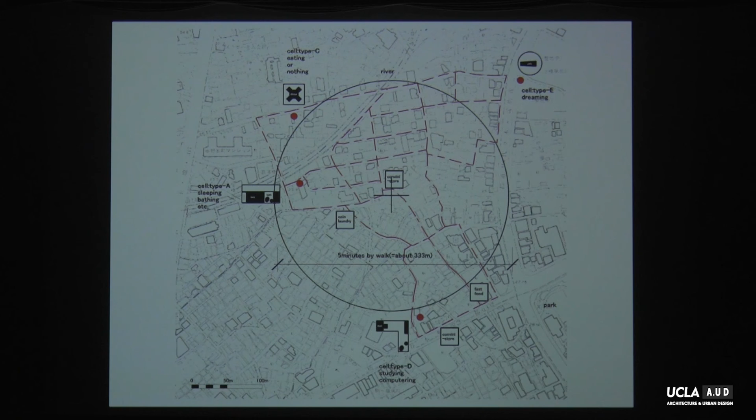Then this is the first project. It was like re-understanding the city of Tokyo. And this is another proposal.

At that time I was also interested in boundaries, because the boundary is one of the most fundamental things for architecture, to make walls, to make a space for architecture. So how to deal with the boundary was an interesting topic. Also my experience in Tokyo affected this, because in Hokkaido it's a really cold place, getting to minus 20 degrees Celsius or something in winter. So the boundary between inside and outside is really strongly divided, otherwise you will die. But in Tokyo the weather is rather warm, so the boundary is rather loose in a sense.

I was living in a small room of 13 square meters, one space, so it's quite small. When you open the door you get out to the corridor. The width of the corridor is around 1.5 meters, so not so different from the width of my house. Then going down to the street, the width of the street is 2 meters, so again it's not so different.

Inside your house, the width of the room is around 2.2 meters, and on the street the width is 2 meters. So it's almost the same dimensions you're walking around. Between inside and outside, you don't see so much big difference. That was interesting for me.

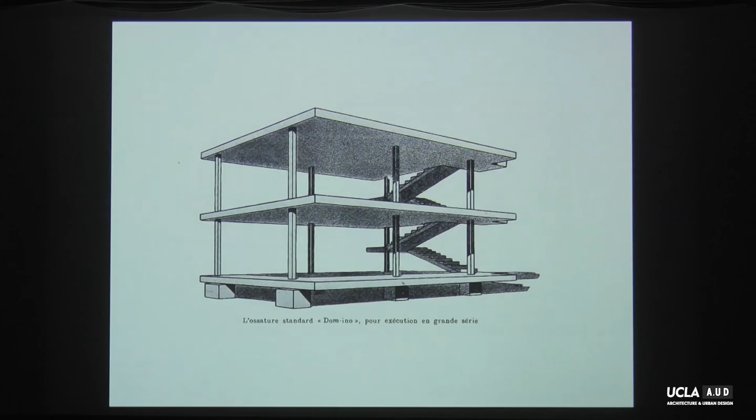I try to, of course—I love Le Corbusier very much—so I like to integrate that kind of chaotic situation with super clear, pure form-like situations together. And finally I invented those kind of crazy compositions: many, many plates. In that sense it is influenced by Le Corbusier's systems.

So many plates with a 35 centimeter gap, so that you can sit on it, as you can see, or use it like tables at double size, 70 centimeters, or use it as shelves or staircases or something like that.

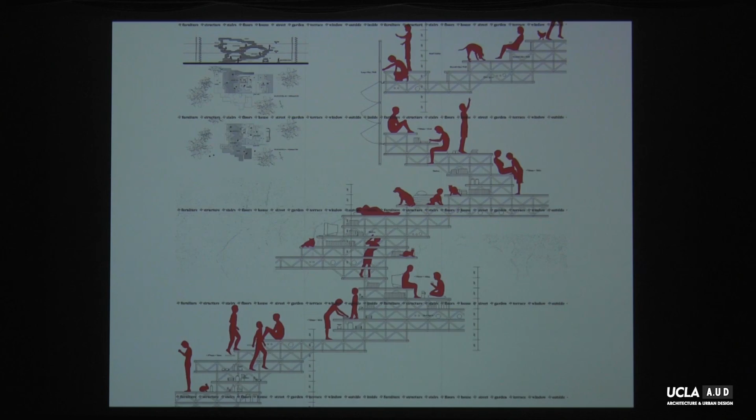There are many, many steps, but no specific functions in it. But if you get closer, you will find how to use it or how you like to interact with it. In that sense, this could allow people to interact as they like—allowing chaos, but within an ordered gap of 35 centimeters.

So for me this is a personal integration of Le Corbusier, pure systems, and chaotic situations. There's also integration across furniture scales, architecture scales, and possibly landscape scales. I try to integrate these kinds of things.

Or I try to re-question: what is furniture in a room, for example? It's normal to have chairs in rooms, but is it really normal? We should have functions, but what are functions? This kind of re-questioning and rethinking enables us to think about strange ideas, but pushes us towards the future.

After those conceptual thoughts, I got a small chance to realize one project in Japan. It was a competition to create a kind of wooden house. I read all the briefs, and at the last sentence they said all the materials could be given by the clients, since the client is a timber industrial company that could provide the whole materials—but the whole budget was limited. So, limited budget plus a given amount of timber.

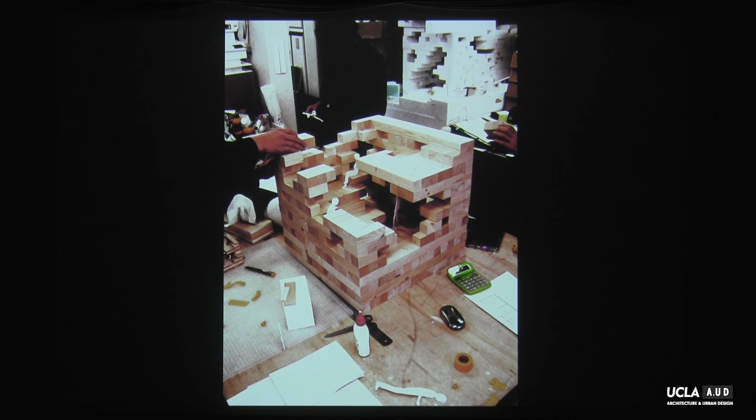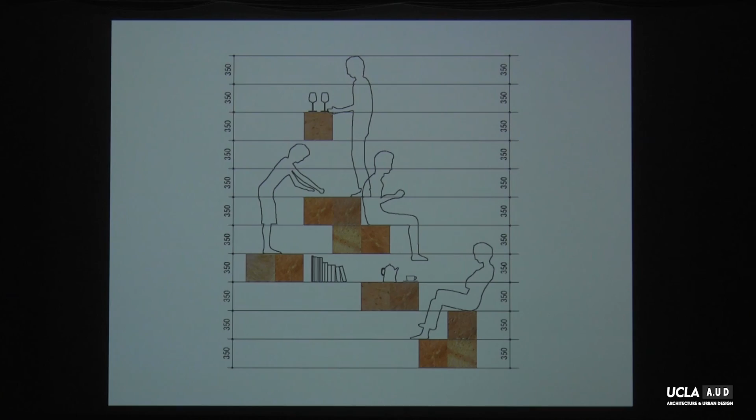Again, this is the same concept: to create spaces for people, but not specific floor areas or specific functions—more like many steps where you can choose as you like. Finally it was built, though reduced and shrunk a little bit, because even using such a big amount of timber, it was too much for the clients, so they requested to shrink it a bit.

The minimal size is about 4 meters by 4 meters by 4 meters cubes. It is quite small, but it has glass walls and doors, and it has a small kitchen and bathroom, so it's like a house, a small cottage.

It was a competition, but it was lucky for me because the head of the jury was Toyo Ito. And he's, as you know, a crazy guy, to choose this as a first prize.

The competition had an open presentation and open discussion to decide the first prize. The jury members included Toyo Ito and other architects, and the head of the client company was there. The head of the timber company was against it until the end of the jury sessions, but Toyo Ito said, 'Wow, you should make it, this is quite crazy and interesting.' Finally, Ito-san persuaded the clients to accept it.

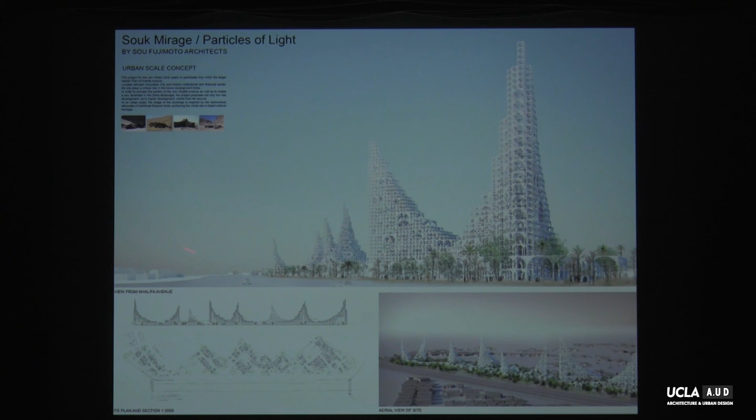So finally we proposed, at first, those kinds of 7 or 8 towers, because the site is so flat in the middle of the desert. Like a landmark, it would be nice to have a landmark. But this is not only a landmark as an object — it has a huge void inside like this to create natural ventilation from the bottom, with cool air going up as the hot air rises.

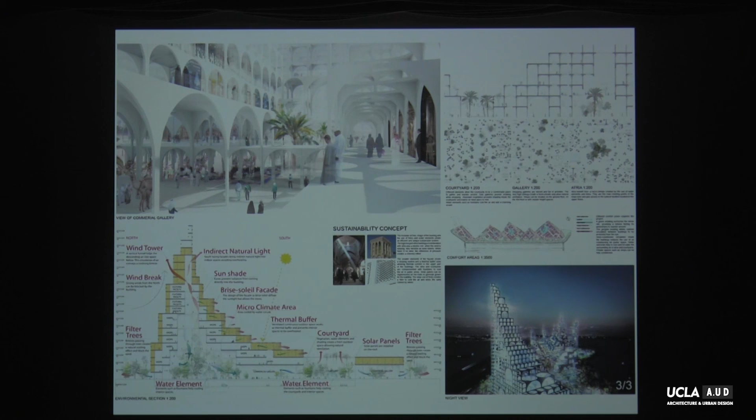So it's a landmark, but at the same time it's like a natural ventilation system. Inside, there's a void—nice, of course, to have such an atrium in the shopping areas. But the most interesting and exciting point is the structural system: many repetitions with arches, circular shapes creating the whole structure, which could work as a sunshade against the strong sunlight in the Middle East.

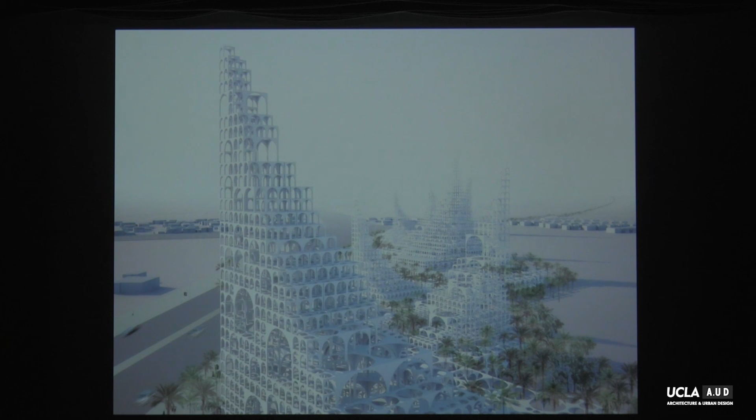So the glass line is set back from the outside. Inside, you can see many filtering structures blocking the sunlight but still bringing in proper, beautiful light. So the whole structural system is making the structure itself, filtering the sunlight, creating a huge void and landmark, and of course the experience of shopping. All of those things are well integrated into this architectural form. That is why we are so excited.

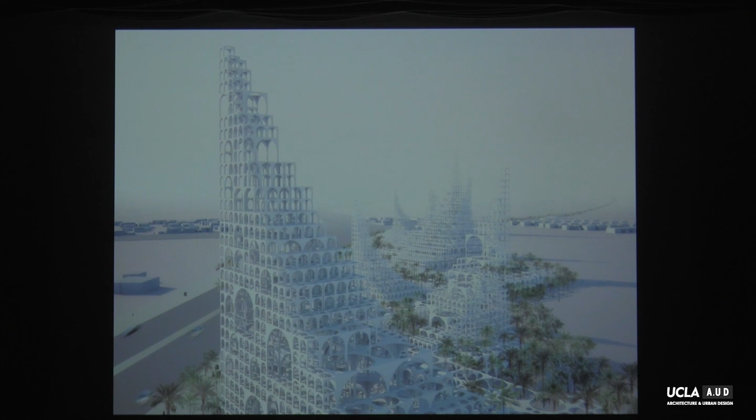As you can see, this structural system is, in a sense, almost the same as the Serpentine Pavilion—repetition of grids. If you don't think about the shape of the arch, everything is like a repetition of grids, sometimes double or triple grids, but everything is made by the grid. The whole shape in the Serpentine case is like a cloud, and in this case it's more like many peaks of towers. But the outer shape could be more flexible. So the system behind it is the same, but the scale is quite different.

That is the thing I didn't expect. When we did the Serpentine, that smallness of the grid was very important because it fits furniture scale, it fits human bodies and interactions. But if you think about 1.2 kilometers, then you can be more brave, forget about the original concept, and expand it to see what it becomes.

Finally we thought, well, this is similar to the Serpentine but different, and could be something interesting because it's beautiful. Then we thought, because they have money, we could make a lake in the middle of the shopping center to put a boat—that kind of crazy shopping experience is possible in the Middle East, with beautiful sunlight coming down.

So we were just enjoying expanding our ideas, being involved in such unknown situations. And yeah, it's quite like beautiful translucent towers in a sense.

But finally, after submitting the 28 panels and starting to talk about the date of presentations, we got one email simply saying this competition is cancelled. Everything stopped—no payment, nothing, no winner, no loser, just stopped. Of course it can happen in the architectural society, but it's a pity.

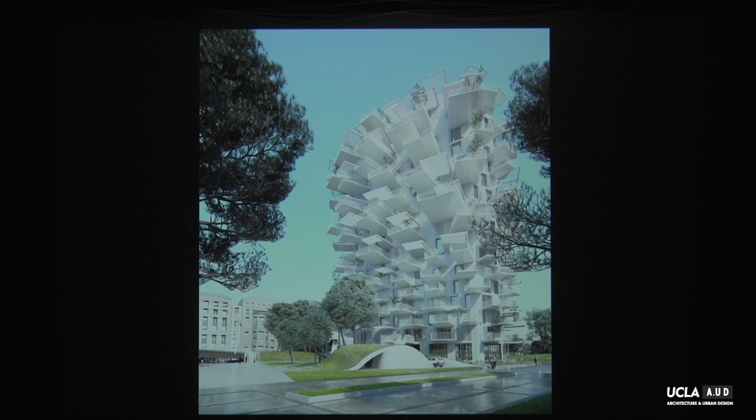This is one of the latest works: housing towers in the south of France, Montpellier. I don't know—this has some conceptual relationship to the previous ones, but again, after making those kinds of crazy things, I'm not afraid of anything, so I have the freedom to do it.

But here again, I met a different culture, different climate, different lifestyle, and those inspirations make me think about something new. Montpellier is a Mediterranean city—their climate is quite nice, like here in California. Even in wintertime, they have lunch outside on the terraces.

For hundreds of years, they have been doing that kind of lifestyle to enjoy the outdoors. So the competition brief was to make a 50-meter high tower, and how their traditional lifestyles could be integrated into such a contemporary high-rise building.

The solution is quite simple: huge balconies. More than 200 balconies and 100 pergolas are on it. The biggest one is 8 meters by 6 meters, so it's quite huge. And many lives are happening there.

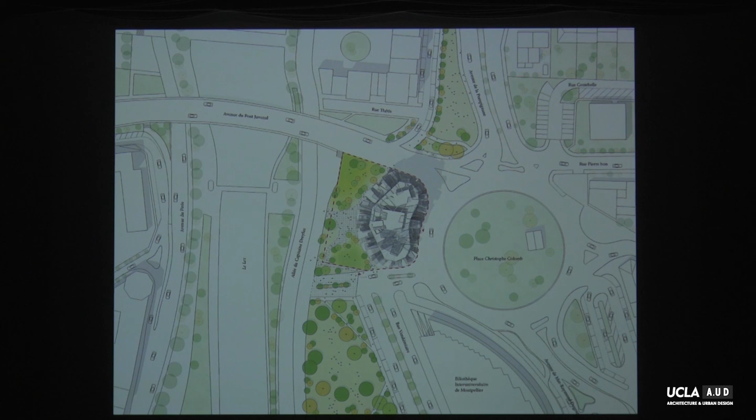The housing volumes and balconies are quite typical typologies of an apartment house. But with the unique shape of the volumes and the huge size of the balconies all around, such basic things change into something new—almost like a pineapple or a pine cone. It's basic, but quite something new.

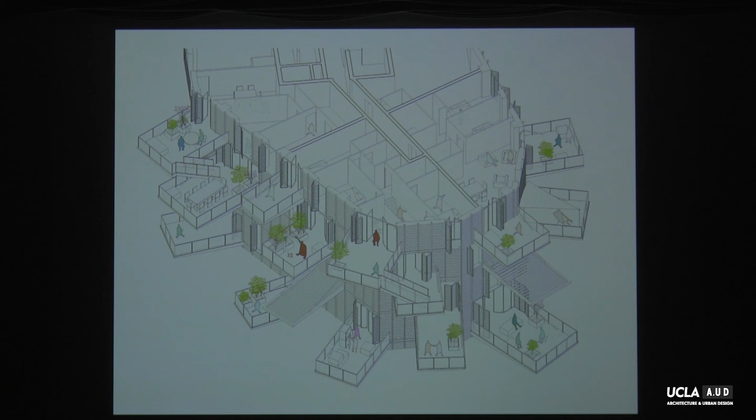Some apartments have 2 or 3 balconies. We also have duplexes—2-level apartments with 2-level huge balconies connected by staircases. It's like sky staircases, really huge living space in the sky.

Now we have the construction process. The building cores or volumes are almost finished, like this, but of course there are no balconies yet—nothing yet. From the end of this month we started with the balconies, from the top to the end. It will be finished in one more year.

This is the mock-up for the balconies, to test the structure, the details, and the finishing. Like this. I'm really looking forward to seeing the finished building.

More interesting to me is seeing the life coming out of the balconies. The building itself is beautiful, but when the life comes out, with parasols, colorful furniture, and other strange things all covering the building, it creates a three-dimensional vertical layering of lives. It's amazing, I think.

The architecture here is like a platform that allows such beautiful lives in the sky, and the foundation of that whole life really must be very beautiful—a 50-meter high stacked life that could happen. I really, really love to see it.

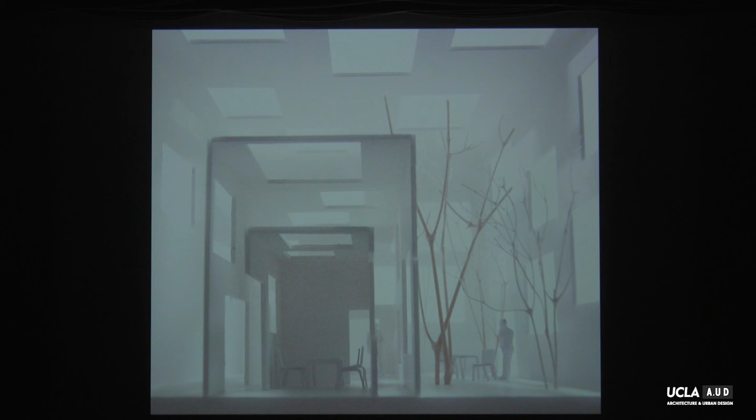The middle box has glass, so it's an actual boundary, but we still have a small house inside. So inside the middle box is still outside the small box, and outside the middle box is inside the big box but actually outside, or something like that—intentionally confusing situations between inside and outside, because we thought definite boundaries are a little bit sad. This is in-between spaces.

We have trees here—this is outside—but as you can see, it's really enclosed by the big box. This diagram shows on the left a normal wall dividing inside and outside, which is a bit sad because it's only 2 choices. On the right hand, we have gradations.

Then we can have more choice. Deeper inside, you can be more private, and then outside, you can be more open. But in between, in the middle, you can have various different situations between inside and outside. I like to create more choices, more varieties for your life. Then your life could be more rich, I think.

So the gradation concept is related to the richness of life. And blurring the boundaries is not only the architectural interest, but try to create how to make rich choices in your life. But of course, translation from such a gradations concept to here should be done, in a sense,

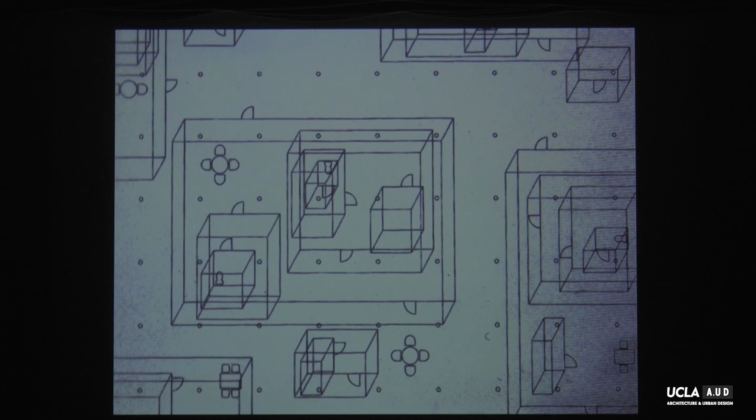it was a jump, because I had the previous ideas of layering done 10 years ago. But to realize those kind of box in box in box, not only in the plan, but even in the sections, was like a big jump for me. And every time those kind of small occasions, the actual site, actual clients, make me think more about it, and finally stepping forward a little bit more.

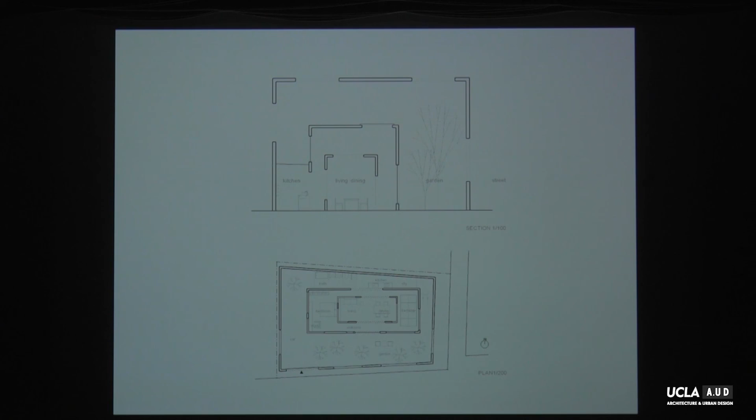And in this case, that kind of three-dimensional layering was like a small jump, because as you can see, this is the situation. All surroundings are like a typical Japanese house. And the front house, from our house, and the garden in front. So this is like a typical situation.

And the previous house on our site, before the new house, from our client's house, was almost the same, house and garden. And in a sense, we just put the bigger box covering the house and garden situation to make house and garden as a house. So it's like changing the definition of just a normal house and garden by the spatial strategies.

This is the view from the inside of the big box. So it's inside, but still outside. Rain comes in, and then you can see the second box. This is a view from the smallest box. So you see small box openings, and middle box openings, then the big box, a little bit fragmented, with openings and the sky. Then you will see, as I said, it is layered three-dimensionally.

And this is fascinating because you can see sky fragmented, covering you. So it's quite open feelings. But at the same time, you are in the middle of three layers of concrete boxes, so it's really, really protected feelings. So those kinds of coexistence of openness and protected feelings are together in here.

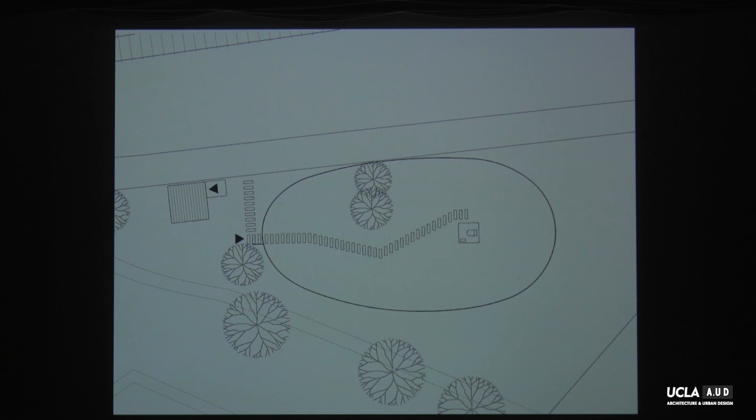So sorry for that kind of situation. Everything is quite simply made, and we kept the existing trees, and the garden itself is just green grass, so it could feel quite natural. I like to make such unexpected situations - open the door, and then the normal green grass and trees are there.

Oh, thank you. Okay. And...

Actually, the funny story - I don't have much time, but I'd like to talk about the funny story of this. Because this is finally done, finished, and it gets famous.

And finally, many tourists came here by big bus to see it. Not only one bus, but 2 buses, 3 buses parking outside, making a long queue to take photos - not to use the toilet, but to take photos, like a touristic place. Well, it's okay, it's nice. The city government people were so pleased about that.

But then, after a while, so many people came, and for some of them the next stop was this toilet, so they'd see it and take photos. Some people thought, wow, the next stop is a toilet, so I'd like to use the toilet, maybe it's a nice place. But then arriving, there was a long queue for photo shootings, so they couldn't use the toilet.

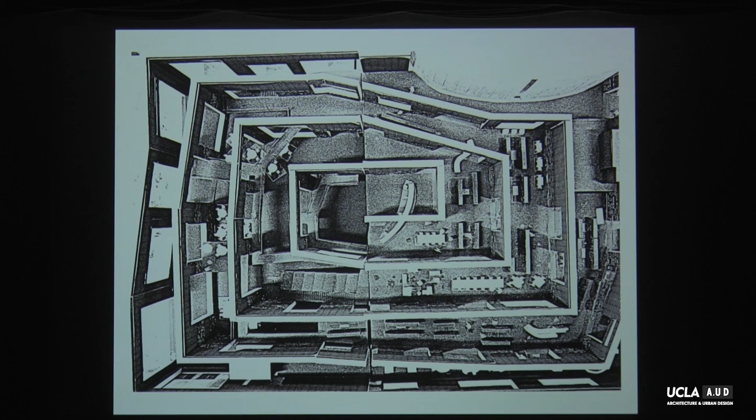This is a library of many, many layers of bookshelf walls, like this. Because it is a spiral shape, only one continuous bookshelf is making the whole library, with many openings. This is an important point - like a house, box and box and box house.

So you will see, you will feel the layers. And then those kinds of layers make you feel, wow, something behind this wall is happening, something interesting is going to happen behind this wall. What is happening? Then you start to walk around.

Because I like to make the library like a forest of books. Of course you have to find some books if you need, but on the other hand, the library is a good place to just walk around without any purpose, to get inspiration, to get ideas, or to encounter unexpected books. Those kinds of unexpected feelings could be like a forest, I think.

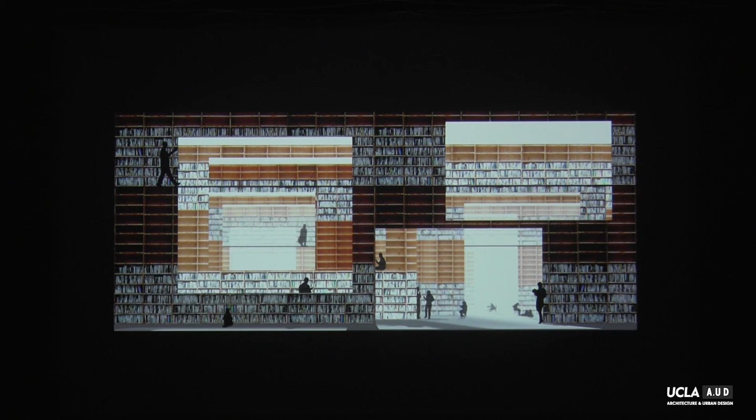And then walking around almost infinitely could be a nice thing, created by those layers of bookshelves. Finally, it's like this. So you will see how the many layers of bookshelves with many, many openings could create those kinds of labyrinth-like feelings.

And even outside, we have those kind of feelings. Inside too, going up to the main floors with the beautiful ceilings, because it's made by polycarbonate materials with the skylights, so it softens the impressions and reflects the bookshelves a little bit more upwards to make almost vanishing ceilings.

And then you will see how the space is always vanishing or always layered. Next space, next space, behind it, to create such kind of expectations and invitations.

Sometimes, most of you could understand how comfortable the space is by this woman. But actually, the space between these two walls is like 4.5 meters, so it's really residential scale. So this is the interesting point of this spiral-shaped form, because each space is defined by such kind of residential scales, divided space by space.

But on the other hand, at some point you will feel such really spreading, huge spaces. So small, tiny, cozy scales and almost infinite spreading scales, both of those scales and in-between scales are coexisting together in these spiral shapes. That is an important point, an interesting point of this form of the plan.

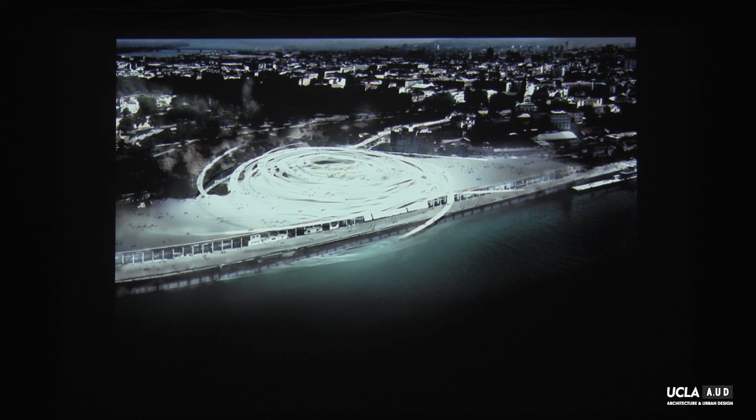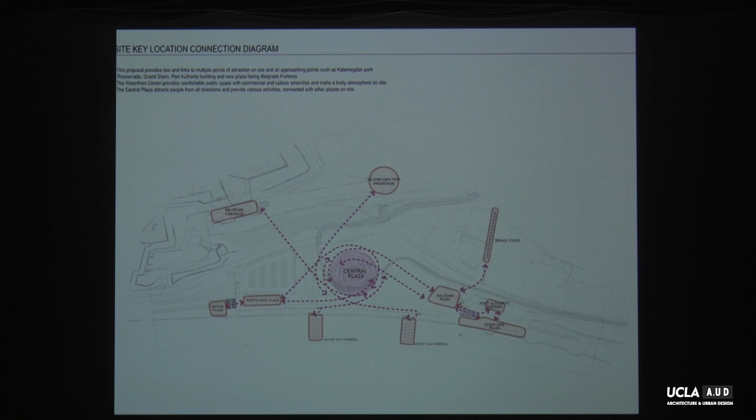And the space itself is not a dead end, should not be a dead end. Many things are coming in and coming out. From the fortress above, people have to come down, and from the river, people come arriving. So those kind of flows are the key of the site, we thought.

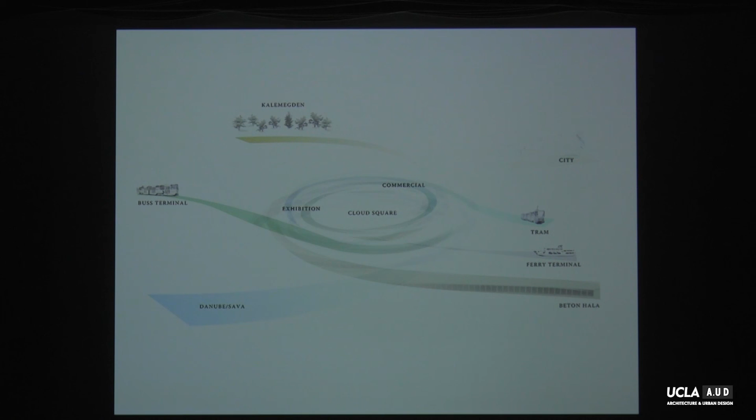So we just translate those kind of site situations into physical architecture, like this - connecting the different levels and connecting the different activities and traffic, but finally creating a really strong central plaza in the middle. So everything is flow, but in the middle of the flow, we have a central point where everybody can come together.

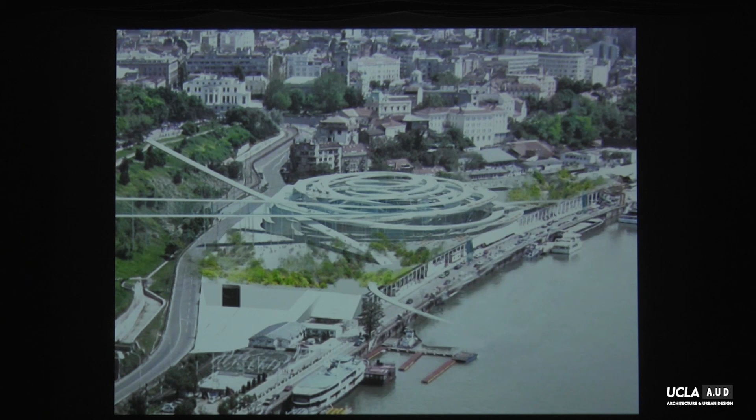So it has commercial areas, exhibition spaces, traffic terminals, cafes, and everything. Those kind of public programs are around that central plaza. This just looks like a pathway - some areas in the middle of the bridges are inside, some outside. So it's really an urban central plaza.

And then people can walk up. Of course we have many shortcuts, so you don't have to walk a kilometer to come down. So this is very different from the delicate treatment of the layers inspired by the spiral shape of the library walls, but it's still like a continuity or consistency of the ideas, just big jumps.

So again, if you meet with such strange situations, you can be brave enough to make a jump. And then finally you achieve something strange or something new for you, but still you can keep your ideas, because your idea is strong enough - consistencies. But jumping to other stages is always quite exciting.

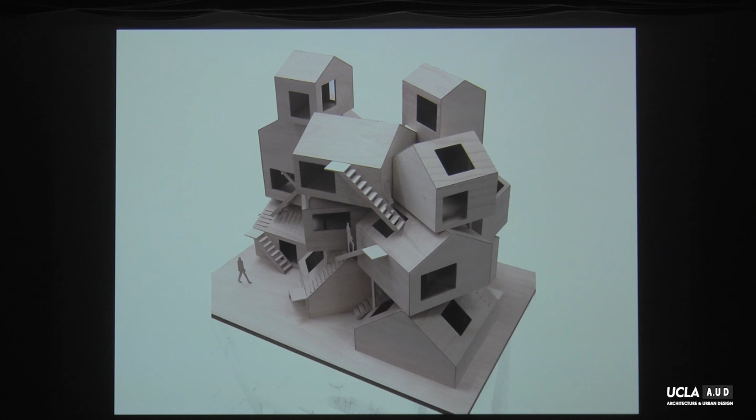Could be very exciting experiences. And then it must be like a housing, small housings. We studied a lot, and then finally made it. The client was crazy, so he enjoyed this, and then finally it's done.

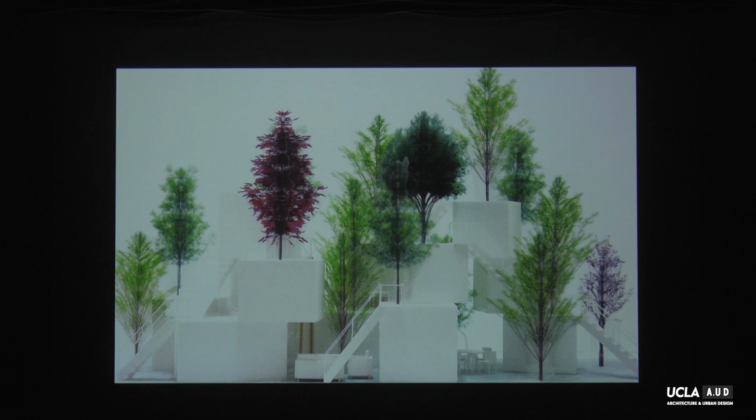And then you will see, it's a bit shrunk, but you will see how those kinds of staircases bring you up to make it like the small pathway in Tokyo, layered and stacked to create the 3-dimensional city, like this. And this one also, like stacked houses with the greens on it, because it is also nice to bring not only the houses but the greens to make it more 3-dimensional. Then you can actually see the pathways, alleys could be 3-dimensional.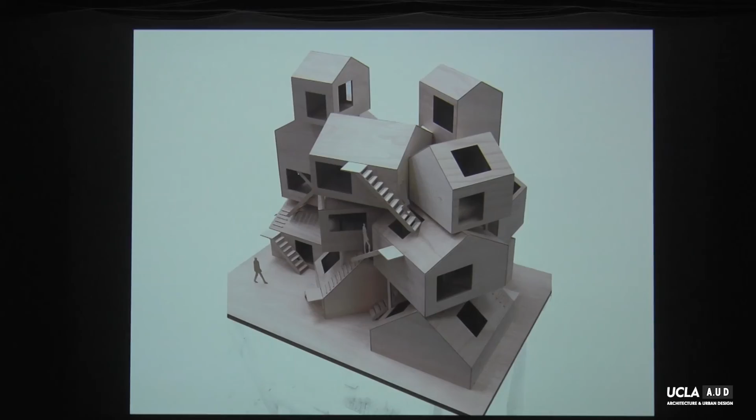This is a private house. It's rather like a model house for experimentation, so not for a specific client, but for the model house. But each small box is quite small. Boxes are small rooms connected by those staircases with trees on them. So it's like this, and some of the boxes are outside boxes, some of them inside boxes. Going back to the previous ideas, this one is like small boxes scattered.

And in this case, on one side, we stacked them up, but still it's divided with some trees on it, and then those small staircases are connecting together. So recreating city-like situations into architecture is always full of inspiration, because the city is so different from architecture. So how to understand two different things in a contradictory situation and try to make integrations is quite exciting and interesting.

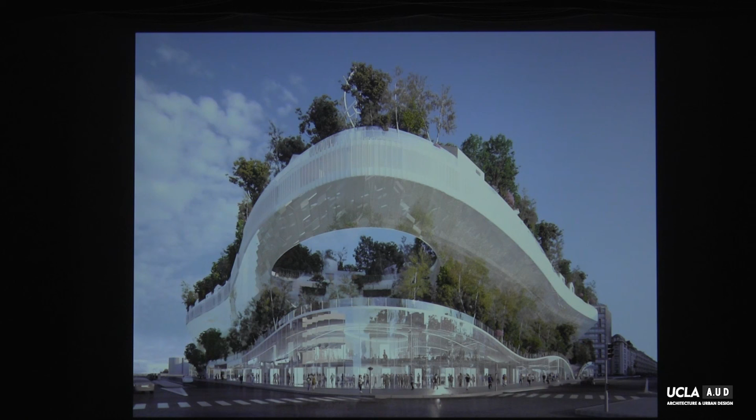And this is the last project I'll show today. This is a project now in Paris. It's a huge project, we won it last year. The title is in French, it says '1,000 Trees.' And it's like this: the concept is a floating forest, just above the city of Paris. And as you know, the city of Paris has a height limitation of 30 to 35 meters.

So most of the houses, apartments are like that. So we thought, what about making a forest floating just above the city of Paris? Then it is quite visible, but quite harmonized. So something new, but sometimes harmonized, could be there. The site is quite special because it's alongside the Champs-Élysées, from the Louvre to Champs-Élysées axis, and at the same time above the peripheral highways.

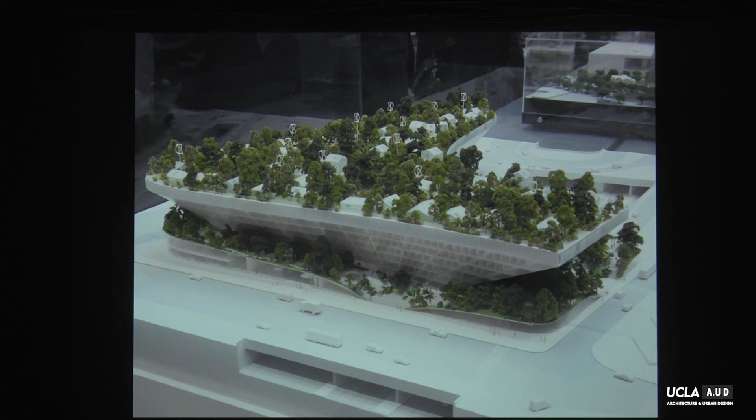This is a model, so you will see how the forest is floating. This is a highway, like this. And then we make the buildings a little bit like this, to keep the forest also on the ground level too. And the program is housing, office, hotels, commercial, kindergarten, and a bus station. So it's quite mixed. The lower part is commercial, and on top, of course, the housings. And then in the middle, we have offices and hotels, and so on.

So it's like this, and I never did those kinds of strong shapes of buildings before. But of course, as I said, it is because we like to keep as much green on the bottom as well as on the top. That is why we made these kinds of strange shapes.

And of course, from the top, it has many small houses. And it is also quite a beautiful contrast, because most of the houses in Paris are apartments, big blocks. So we brought such small houses, like Japanese houses, on top of the greens. So small villages with a forest right above the city of Paris, floating.

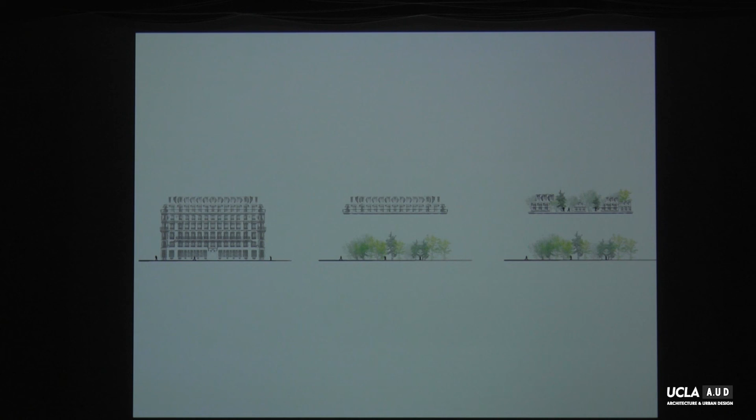And this is the diagram we showed at the competition. So the left hand is the Paris apartment. We open the bottom to make a forest to the public, and we transform the top into villages with a forest. Especially the Paris rooftop is quite attractive.

So here, of course, we met with the city of Paris, a really strong context we never worked with before, and a lot of inspirations came out. And then how to make a harmony and contrast, what is new, but still should really respect the city of Paris. So those kinds of contradictions, a lot of different types of contradictions, led us to finally make this. And from above, it's really a green field. Could be the green landmark.

And this is the lower part of the public parks. The commercial areas are on the ground level, but then we make the landscape so that people can climb up to the lower rooftops. And then you will see the floating forest above.

So, the conclusion of today: keep questioning, rethinking what things fundamentally are, even in basic things like walls, house boundaries, functions, chairs, furniture. Keep re-questioning, that is quite exciting. And be optimistic. Anyway, you can make it, you can get it. If you are optimistic, if you question a lot, and if you continue being optimistic, you can get it. And be honest. Thank you very much.